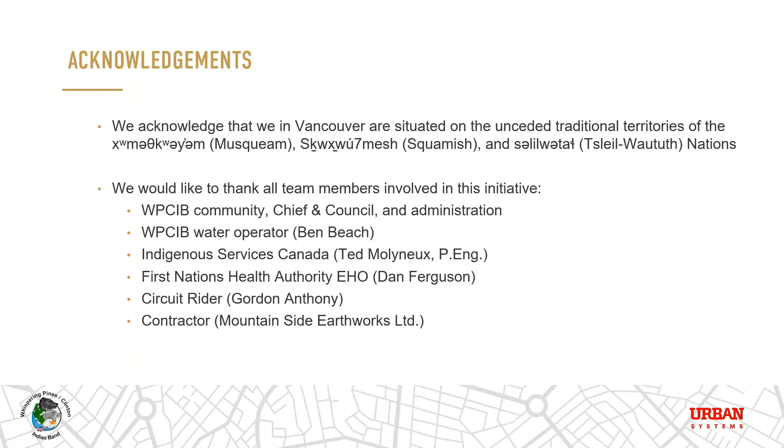So with that, we'll just get started. Whispering Pines Clinton Indian Band is a community located 35 kilometers north of Kamloops. It's in a semi-rural area, so some services aren't close to a service center. There are about 35 homes in total, and a couple of community buildings, administration, and a daycare.

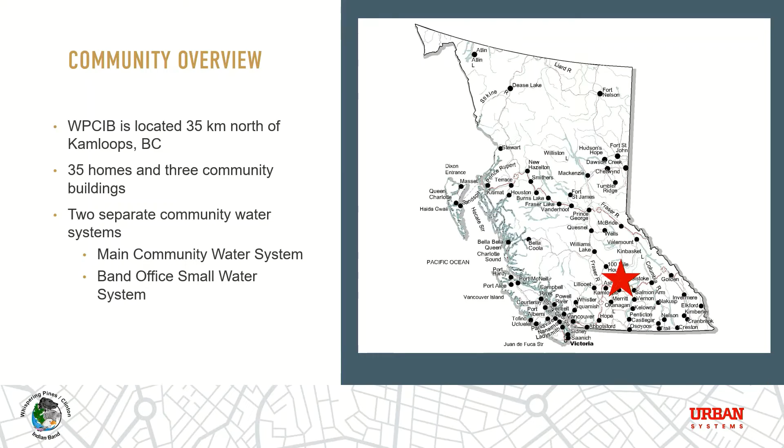The community is actually serviced by two main community water systems: the main community water system that services the subdivision and an administration building, as well as the small water system, which is considered the band office water system, servicing 4 or 5 homes and 2 administration buildings. The focus of the project was to address improvements on the band office water system, because they'd been on a do-not-consume boil water advisory for a number of years.

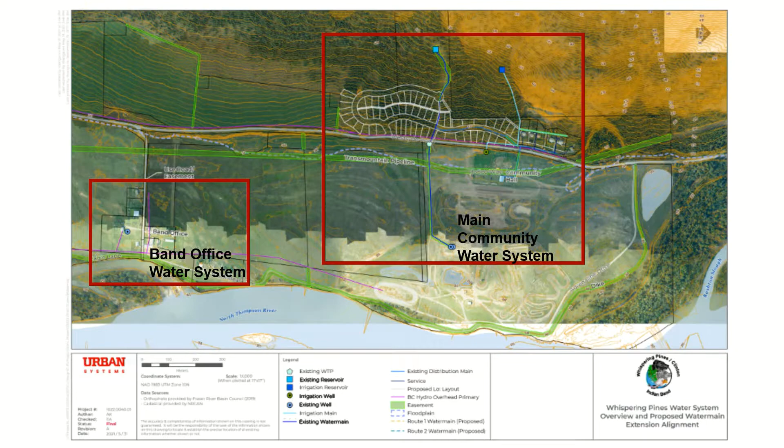The main community water system consists of 2 well waters providing raw water to a water treatment plant for iron and manganese removal. Chlorine is primarily used for primary and secondary disinfection, as well as pre-oxidation for the iron and manganese removal through filters similar to the Filox.

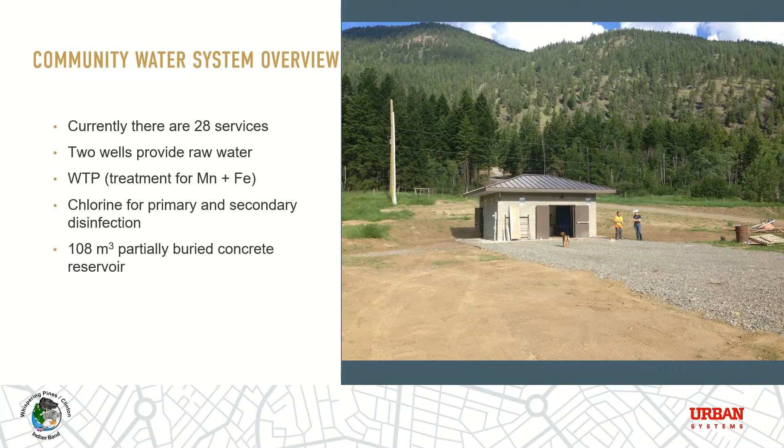Partially buried concrete reservoirs provide storage and gravity distribution to about 28 homes. The band office water system provides water from an individual well with no treatment, disinfection, or reservoir to about 5 homes, as well as a band office and a daycare.

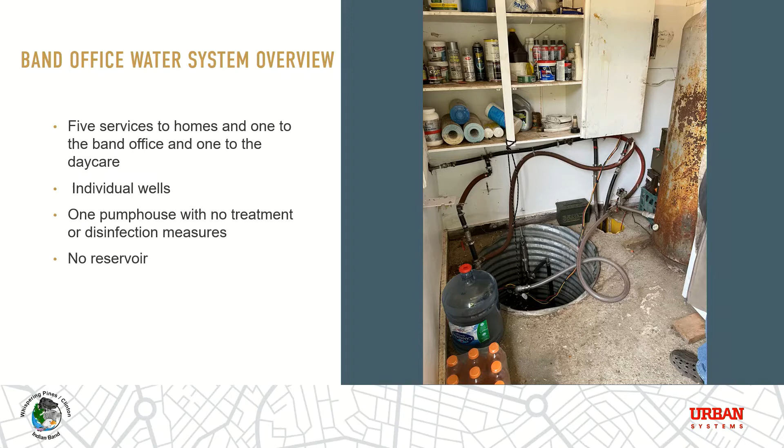Given that it's an individual, small, shallow well, there was a high nitrate concentration, which placed the system on a do-not-consume advisory for a number of years. Given that it's an on-demand system, there's no opportunity for expansion, given no reservoir, and as well no fire protection. So the way we came about this project is that the community has been wanting improvement on the system for a number of times.

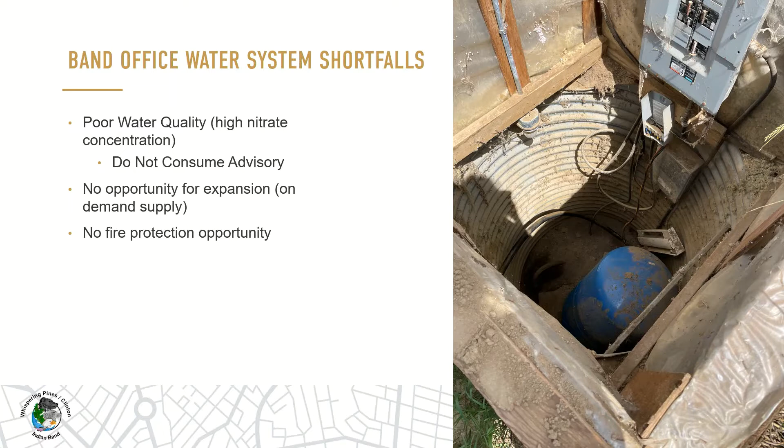So we kind of looked at a different approach on how to implement the changes. We're engineers, so obviously we start with a feasibility review because we like to do assessments and understand what's going on. We looked at two main improvement assessment options: one was a localized solution, building a new water treatment plant for the system, and the other was extending the water line from the main community water system all the way to the system.

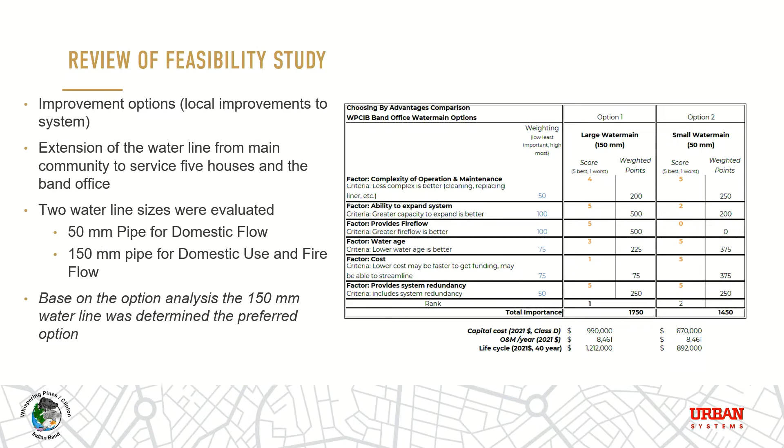A variety of water line dimensions were assessed: a 50 mil for just domestic versus a 150 for both domestic and fire flow. The 150 was determined as the preferred option, given the opportunity to provide both potable water and fire protection in the future, as well as community growth.

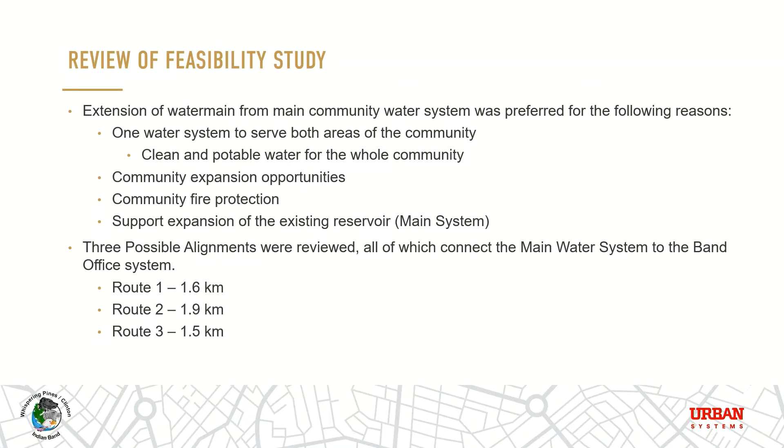It was our assessment that instead of building another water treatment plant specific for that community and having additional O&M costs and more headaches for the operator handling several systems, if we're able to extend the water line, it would just be a continuation of the same. This also provided expansion opportunities in the future with the new water line. Fire protection was being considered given the size of the water line, and newer connections provide a rationale to increase the water storage for the existing reservoir as well.

So we looked at three main option alignments from the community water system. Route 1, the orange, goes through a future subdivision and then crosses over the highway and down to the band office area. Route 2 goes east down towards the North Thompson River and over. Route 3 goes straight down from the reservoir, does the crossing, and then over.

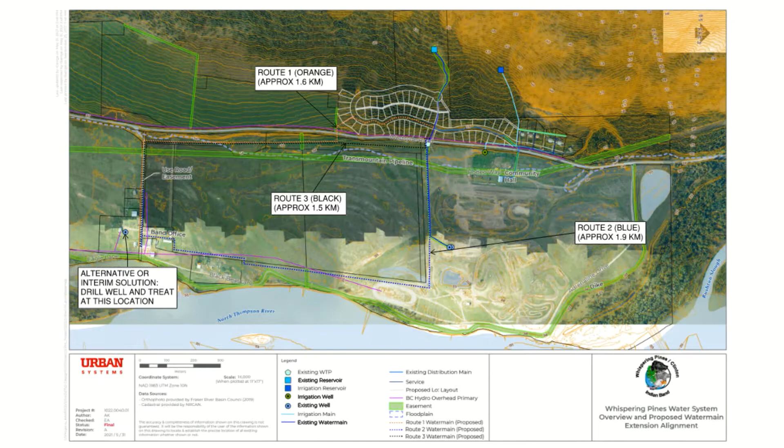Given these three options for the alignments, Route 2 was the preferred option because it avoided some geotechnical hazards, since there's a sileage pit through one of the other alignments. It also avoided any potential future relocations given where the new subdivision was going to go, as that was still in the design phase, and it minimized disturbance to the community roads, given that it was less developed down east.

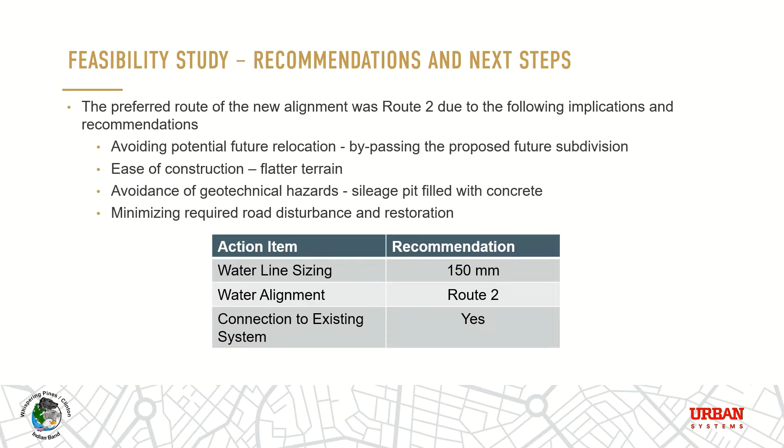Following the feasibility study, we wanted to jump right into implementation as opposed to completing a design, writing the report, issuing drawings, and then doing the traditional design-bid-build. So with that, I'll pass it over to Julia, who will speak about our project approach and how we moved on from this.

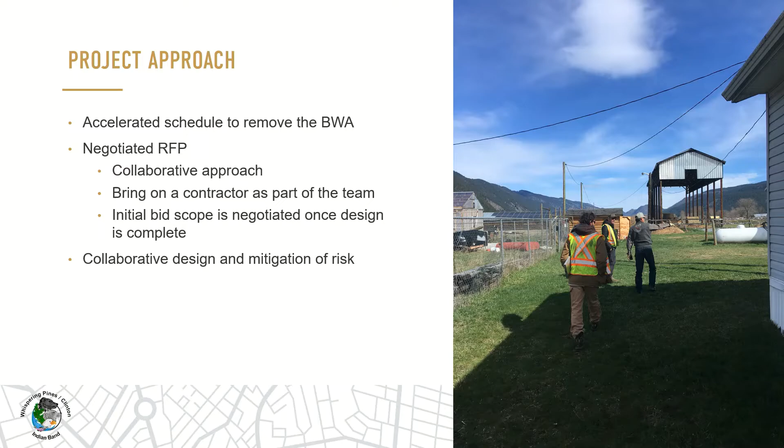Thanks, John. As John said, we wanted to use an alternate delivery approach as opposed to the traditional design-bid-build. This was for two reasons: the community had been on a do-not-consume order or advisory for over 7 years at this point, affecting those 5 homes, the band office, and the daycare. Also, Indigenous Services Canada had a surplus in funding that needed to be used quickly. Since this project was technically already set up and ready to go, it was a perfect opportunity for that.

So the approach we went with is a negotiated RFP. A negotiated RFP is kind of halfway between design-bid-build, so going to tender, and an IPD project, which is integrated project delivery, if anyone's heard of that. So it's a collaborative approach—you actually bring on a contractor before you finish the design.

When we issued the RFP, the design was not complete. It was only a concept, and we'd only done the feasibility study. Then you bring on the contractor as part of the team, and you complete the design with them, with the owner, and with the other stakeholders of the project. This is actually a lower risk project for the contractor and for the project in general, because the contractor's initial bid is not set in stone. As we go through the design, the scope may change, and then you negotiate that bid price at the end before you sign the final contract.

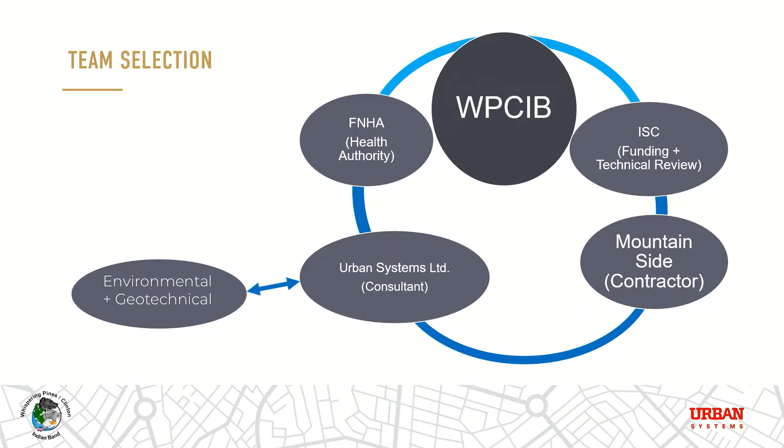So in this project, this was our project team. The owner is Whispering Pines Clinton Indian Band. We also had Indigenous Services Canada involved in the funding, and they also provided some technical support, so they were part of our design process. The contractor was also part of the design process. We also had FNHA involved, who advised on some of the water quality testing requirements, especially for such a long water main. Finally, we as Urban Systems were the consultant and also did the environmental work, and we hired a geotechnical consultant to help out as well.

To go a bit deeper into the negotiated RFP process: basically we put together a request for proposal based on a conceptual design. We developed a schedule of quantities that was not set in stone, included that in the request for proposal, and then sent it out to 3 contractors that the community was either familiar with or that we knew had a good reputation and that the community liked working with.

We then vetted the contractors not just based on price, but based on a set of qualifications—experience, their proposed schedule, and value-added solutions they were asked to provide. In this case, the decision between using HDPE and PVC was not very clear, so we wanted their input on that as well. We reviewed the submissions based on set criteria laid out in the RFP beforehand, and ultimately the community decided which contractor they wanted to go with.

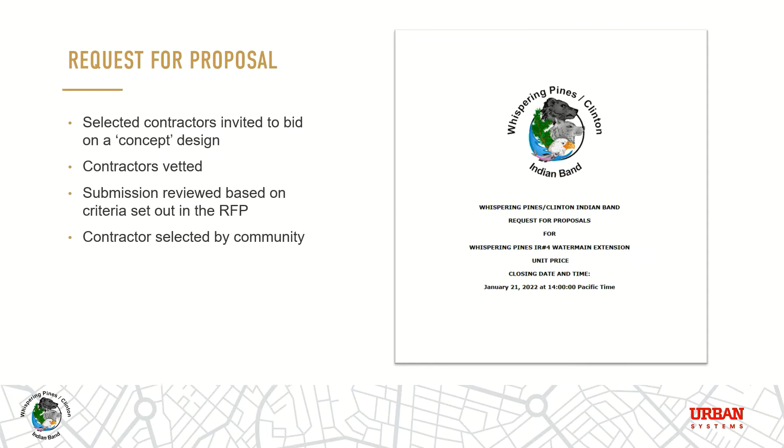After we selected a contractor, we needed some background information, but because of the streamlined design and process, we decided to forego field investigations. We felt we could do this because we strategically selected sub-consultants who had a lot of previous knowledge in the area. We had worked with Whispering Pines a lot previously, and our geotechnical consultant had done a lot of test pit reviews and field reviews before then. So we only did desktop reviews before completing the design, essentially - that was geotechnical and environmental reviews.

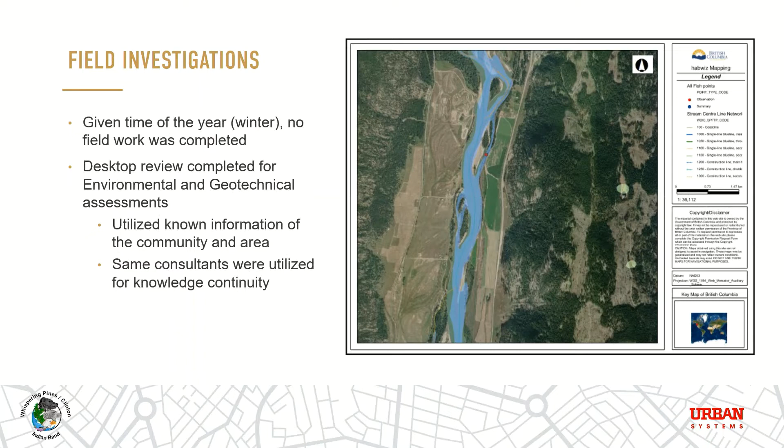The actual collaborative design method was basically 3 virtual design workshops. In those workshops were all the stakeholders I mentioned before, and basically everyone attended each one. Indigenous Services Canada attended, FNHA attended, the owner attended - so their chief and council, as well as some of their staff.

We basically coordinated and discussed the project scope. That included the alignment, the materials we were going to use, which community members and which homes were going to be connected. We also all came to the table with improvements we thought could be included in the design, and then we compared those improvements using a method I'll discuss on the next slide. We also discussed cost implications and risk factors.

It was really useful having the contractor involved, especially with, as we all know, supply chain issues are a huge deal right now. It was really useful having the contractor who had real-time data on the availability of products and the pricing of products, which also helped with schedule implications.

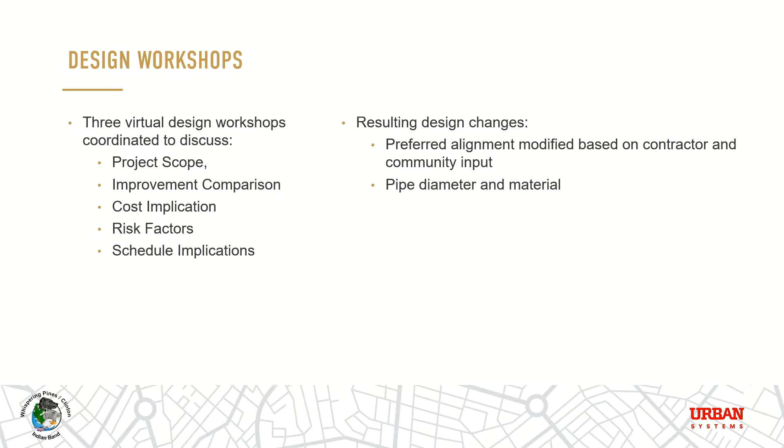The design workshops were actually surprisingly successful and surprisingly impactful on the final design. It ended up changing the preferred alignment that we had come up with in the feasibility study, and it also changed the pipe diameter and material, which I think just goes to show getting everyone's input can make a huge difference. These were actually the new preferred alignments.

One of the big improvements that came out of the design workshops was that we discovered as a group that we do not have to cross Westsyde Road, that highway at the top there, in order to connect to the existing community system. That was a big cost-saving measure.

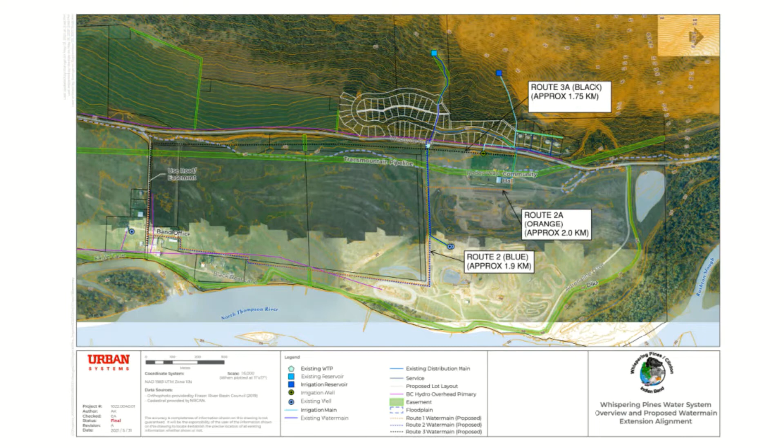Instead of crossing Westsyde Road, we could just go right through, cross that existing water line, and then connect by the community hall there on the right. That's where Route 2A and Route 3A came from, because they were just an alteration to the original design. Route 2 was the same as the original, so it still crossed Westsyde Road. But it turns out the two top solutions were Route 3A and Route 2A, so that's what we compared.

One of the methods we used to actually select the final design was a choose by advantage method. Essentially you set up these tables and come up with the most important criteria to the community and also to the engineers and contractors involved - things like timeline, pricing, market availability, operations and maintenance complexity, ease of construction. Then, as a group, you weigh each criteria based on your priorities and the owner's priorities, and then you score them as a group as well.

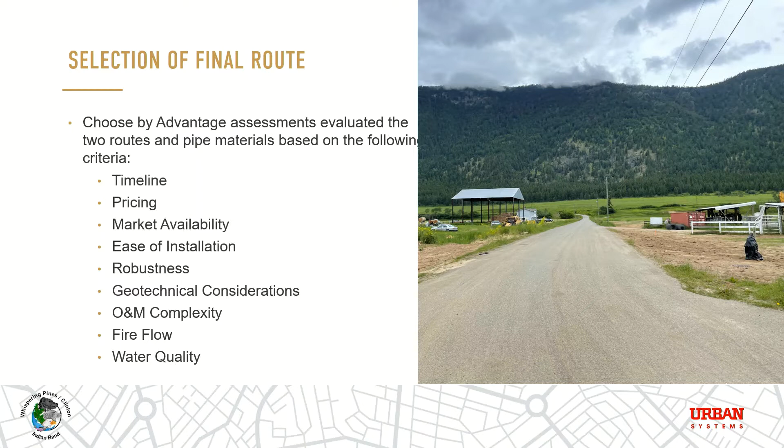This is actually an example of one of the tables we used, for alignment 3A. We scored alignment 3A and alignment 2A, and we also compared HDPE and PVC, and 6-inch and 8-inch.

It came out that HDPE is more favorable for the transmission line because it's more durable and more robust in uncertain geotechnical considerations, which we had to consider because we didn't do field investigations, as you may remember.

PVC was actually found to be better because the community, the water operator, as well as the contractor were all more familiar with PVC because it's been used for longer. So we were all thinking it would probably be preferable to use for areas that had a higher number of existing service connections as well as potential future service connections. And then we had to have 8-inch in there for higher fire protection as well.

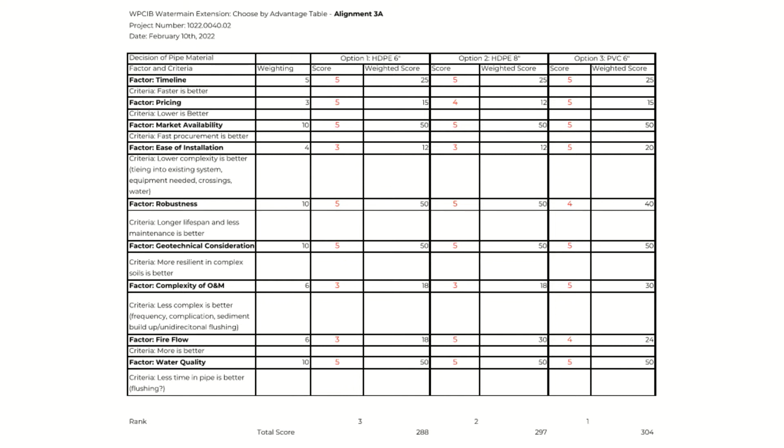I do want to mention that choose by advantage tables are not actually a final decision maker. They're just a tool to help you make a decision, especially when things are unclear and there's not a set answer. It's just a helpful aid, but the final decision is basically the community's, really.

And then finally, for the smaller design components, we worked a lot with the contractor, the circuit rider, and operators. A lot of that was based on their previous knowledge, like what they like to work with and what they've had good experience with - things like hydrants, valves, and air release valves. It was also based on the contractor's knowledge of availability and market pricing, which helped decide the more specific items.

Then another big step we had to do before finalizing design was CP holder agreements, the certificate of possession. Because the water main alignment and all the routes had to go through some CP holder land, we had to come up with right-of-way agreements so operators wouldn't run into problems later when they had to maintain the water line going through that land. It was a long process, but it ended up being helpful in keeping all the community members informed.

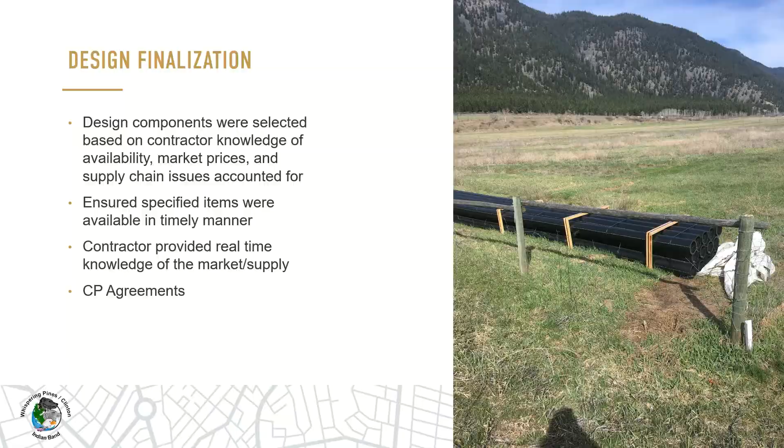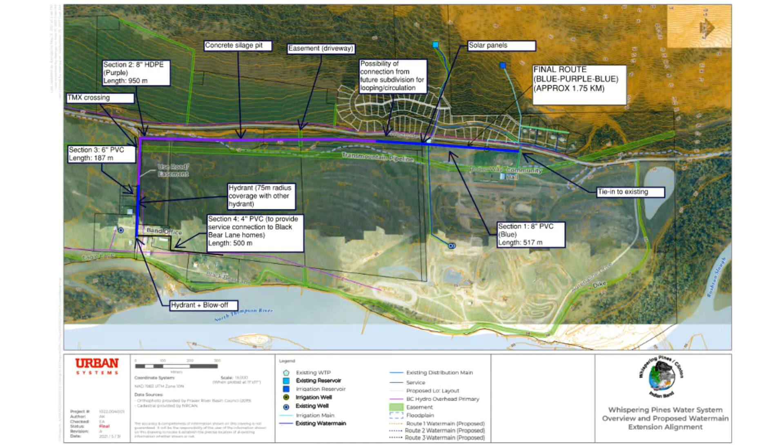This was from our final design workshop. We did not use this as the design drawings - it looks like I made it, because I did. But this came out of our final design workshop as the high level figure of the design. The dark blue is 200 millimeter PVC, used for areas with a high concentration of service connections. For the transmission main, we decided to go with 8-inch HDPE for durability and a higher flow rate. At the bottom, we went with 100 millimeter PVC because it's all CP holder land, so there aren't expected to be any future connections. I also identified where we were going to put some of the details.

So how do we engage the community? Through the nature of this project implementation, you end up engaging the community a lot through the process naturally. In the design workshops, we had the chief and council there every time - they were our main communication and connection to the community at that stage. After that, we presented at a community engagement workshop, basically a community meeting. A lot of members attended, and we answered their questions.

We also distributed pamphlets before construction was going to start, and then again when specific homes were going to be impacted. All the homes needed pressure reducing valves because of the difference in elevation, so before entering people's homes, we distributed pamphlets as well.

We ended up having a lot of consultation with community members on site, just by the nature of the project. We were on site a lot, and a lot of the project was going right through people's properties. As a result, there were some last minute changes, which ended up being fine - we had to move a couple yard hydrants, and we kept one more well connected than we thought we were going to. It was through having that open communication between the contractor, us, and the owner that we could make that happen.

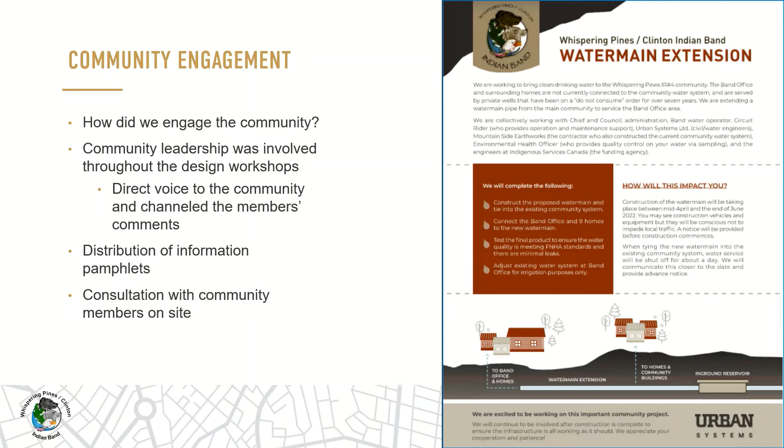So the construction timeline, and actually the timeline of the project - to give you some context, we wrote the RFP in late December, and it closed around January 20th. We completed the design by mid-March, mobilized on April 11th, and total performance was August 9th, so pretty recently. The whole project was around 7 months, from the end of feasibility to the end of construction, which was actually quite impressive - a really quick timeline, and the collaboration helped a lot with that.

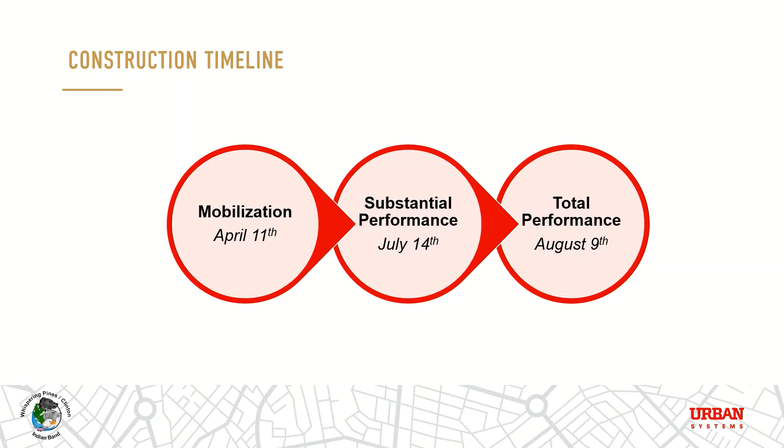Some of the construction challenges we had as a result of the streamlined design included unexpected topography. We did not get a topographical survey done beforehand because we had LiDAR in the area, but the LiDAR points were around 10 meters apart. So there were a couple hills and dips we didn't catch, but the contractor just field-fitted the alignment and it ended up working out - they just tracked their changes.

We had an existing water main crossing, as well as a TMX pipeline crossing, because the pipeline goes right through the community. We had to get a TMX permit approved for that, and TMX representatives were present when hydrovacing around the pipeline and excavating in that area. We also had the CP holder and easement agreements, as I touched on before.

We also ran into some unexpected existing infrastructure, which happens. There was a 12-inch decommissioned pipeline that we had to go around. There's also a septic field, so we excavated around it and followed the drinking water guidelines to go through there. And then there was a little community garden shed, which we just removed off the alignment and replaced once we put the pipe in.

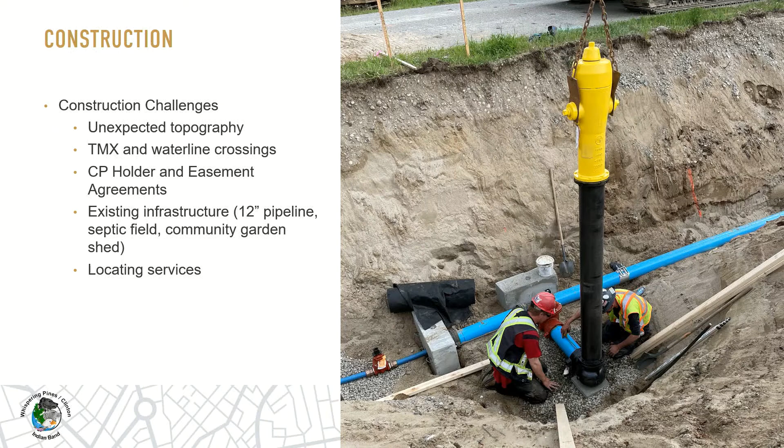And then one of the other tough parts was actually just locating services. A lot of the work in the homes took almost the most time, I would say.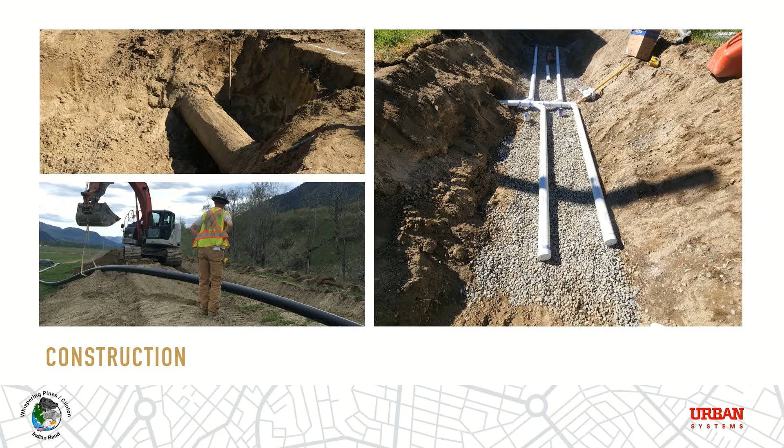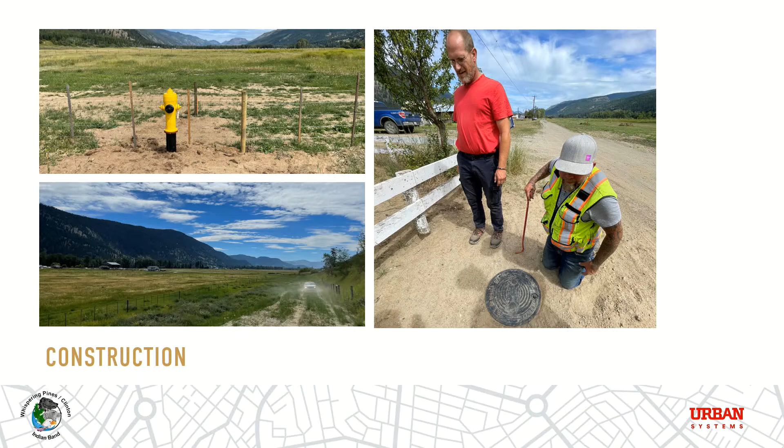And then these are some of the photos just from after construction is completed. You can't see much with a water main, but top left is the hydrant. Bottom left is part of the alignment after it was already filled over. And on the right there is the water operator and the contractor just checking that all the valves and air release valves are working.

And then finally, to complete the project, we did the bug tests and pressure tests that, once approved by FNHA, recommended the removal of the do not consume order, which was really exciting. So people now have water flowing into their homes. They used to have to truck it in.

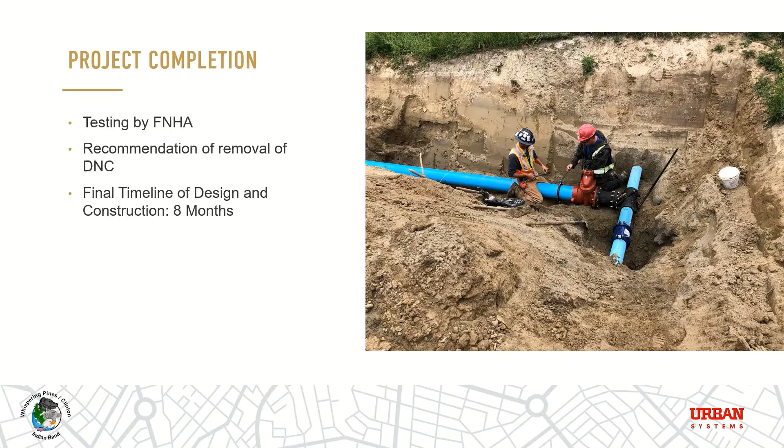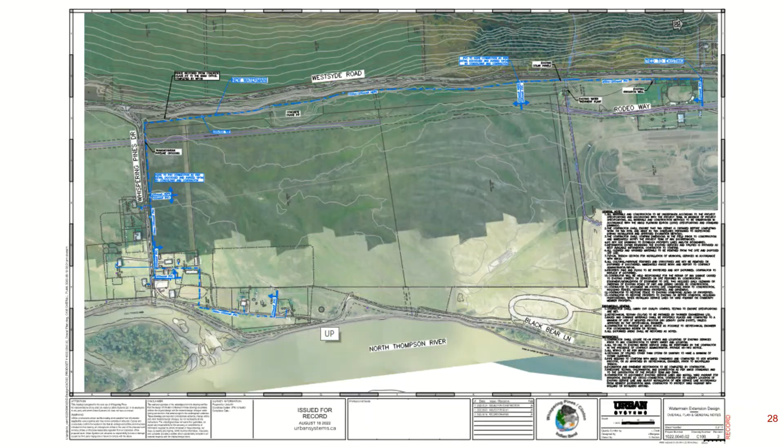So, reflections and lessons learned. I guess collaboration brings out the best in us. I found this process to be really useful for forming those relationships with the owner and the contractor before you get to the really stressful part of a project, which is often construction. Because we did the design together, when changes did happen in the field, the communication was a lot more seamless, and there was more understanding between each party as well. So it made the construction process a lot more enjoyable, I found.

Community involvement as early on as possible we found was really useful. Because our design from feasibility to what we came up with at the end of those design workshops was actually quite different. So that was great to know. And then keeping the water operator involved throughout the process was really important too, for getting input on those smaller design details as well.

We are really just visitors, and the community knows their needs best. The risk management approach of the collaborative method actually ended up being pretty successful. We only had 3 change orders, and they were all small in magnitude compared to the project budget. So that was pretty awesome. I would say in general it does reduce the risk of change orders, because you predict and try to anticipate those risks before going to construction. And you get the contractor's input on constructability, which is often overlooked by engineers.

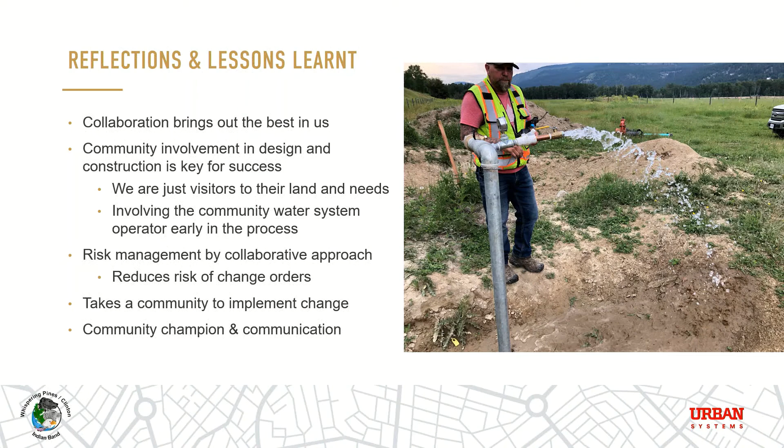Sounds like you had more collaboration with the contractor and the operator than you normally do, which helped you out. Is that something you would be doing in the future, or was it specific to just this project?

I believe so, well, I would say we hope to continue that in the future. In terms of funding for these projects, there's a certain type of project, especially with Indigenous Services Canada, that they would want to fund for this. Also, alternative project deliveries, there are many different kinds, and a lot of them have that collaboration aspect as well. So it really depends on the project.

This one worked really well because it was a water main, so it was kind of a simple design. We could streamline it. But on really complex projects, often people go with maybe integrated project delivery, which is more stringent, but also has that collaborative aspect to it as well.

With the contractor, it depends. With the water operator, I would say it would definitely continue on most projects. But to further mention, IPD provides a reward scenario as well for the parties involved, whereas the negotiated RFP just basically doesn't have a reward system. The reward is making the project a success.